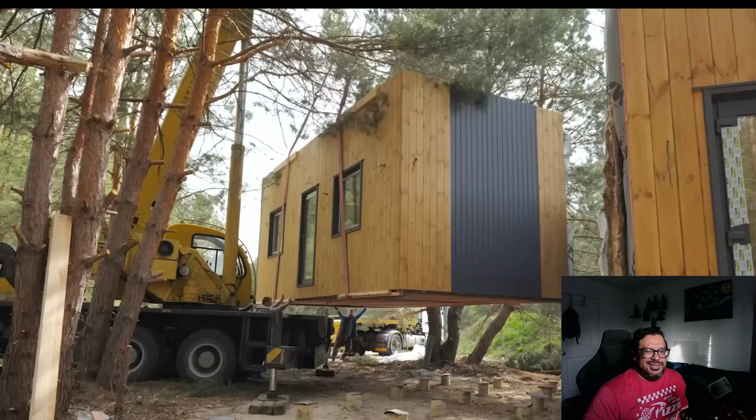Prefab homes are faster and cheaper to build than traditional homes. They promise less waste, more sustainability, and flexibility, to be shipped to almost any location in the world. Faster, cheaper, depends. It's economy of scale. If you order a bunch, then yes, it'd be cheaper. The ones we were working on were pushing 150 per square foot.

So why isn't that future now? Hi, I'm Michael Wyetzner, and I've been an architect for over 35 years. And today, we're going to look at the many lives of prefab architecture, from its ancient origins to its modern innovations, and see why it could be the future of home building, but it probably won't be.

Exactly. I know where he's heading.

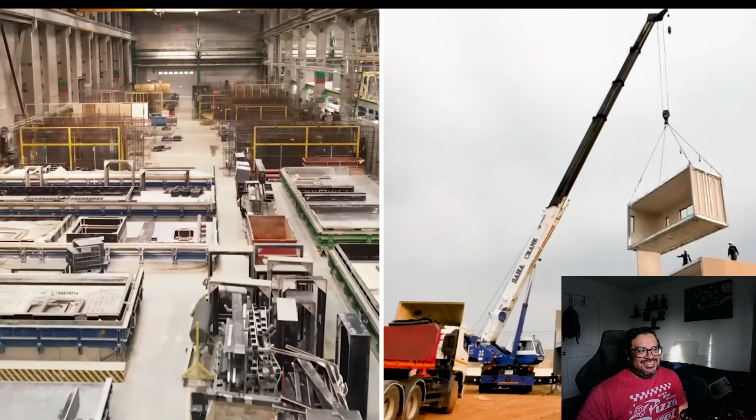First off, the word prefab is short for prefabricated, which just means that the components of a building are created in one place and assembled in another. The earliest forms of prefab housing were created.

So prefabrication is exactly how he said it. There's all kinds of types, right? You can have the full modules completed, or where we worked it was a full module completed, shipped, assembled on site. There wasn't really much assembling, right? All the plumbing was included, all the furniture was included, everything exterior. You would have to leave about a half-inch gap between the units so you could finish it off.

There's also back in the 1940s, when the GIs came back, there was the Sears catalog. They would sell you a kit of parts, right? So they send you all the parts ready to assemble. You put them together. That's a prefabricated home. The other type would be they ship to you all the walls completed already, or there's companies that do that. They'll assemble the walls, everything, and they just come and pop it up together. So that's all what prefabrication means.

Tens of thousands of years ago by nomadic peoples around the world, including the Native American teepee, the Mongolian yurt, the Sami lavvu. I call it a stretch if these are prefab. They weren't assembled somewhere else and brought to site, right? These were assembled on site with their environment, the buffaloes they killed, the hides. So it wasn't exactly prefab. You could also say lightweight prefab, right? But he's right.

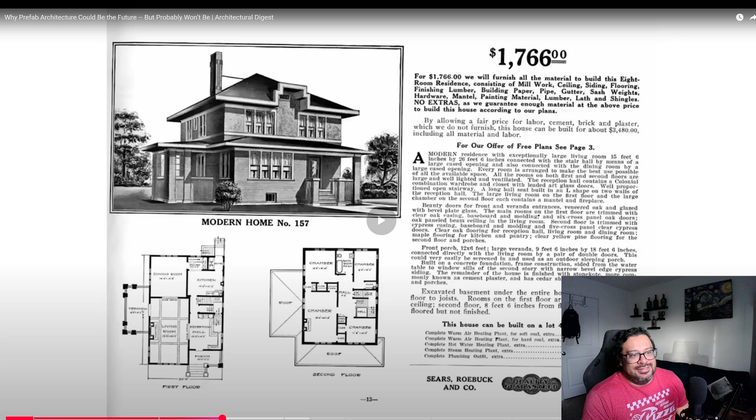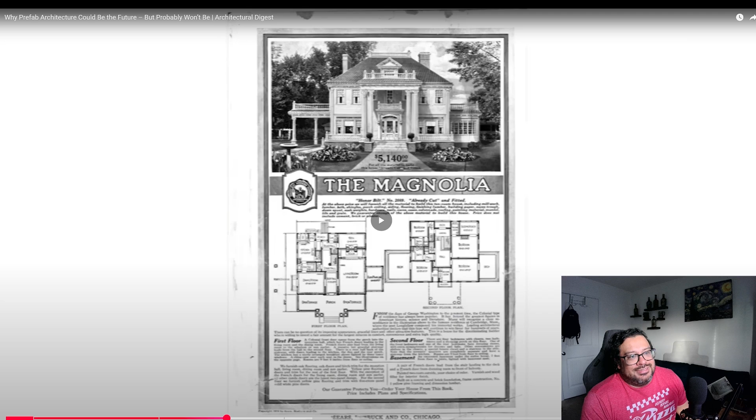Ordered a home from the Sears catalog. Now you have all the red tape of permits and all that stuff. They would provide you with wood pieces cut to size. And you guys will see right away, you guys might know these homes. You might walk by them, they still exist. Very well built. The nails and the screws and the directions.

And oftentimes we'll hear the criticism, right? Oh, they don't build the homes like they used to. No, those homes have problems. Try being in one of those homes in a hot summer, and if it wasn't designed to allow fresh air through, it's hot. I think homes today, the craftsmanship is not as good as it was back in the day, but the materiality and the energy efficiency are much better today than they were back in the day. Just like a flat-packed piece of furniture that you would buy today.

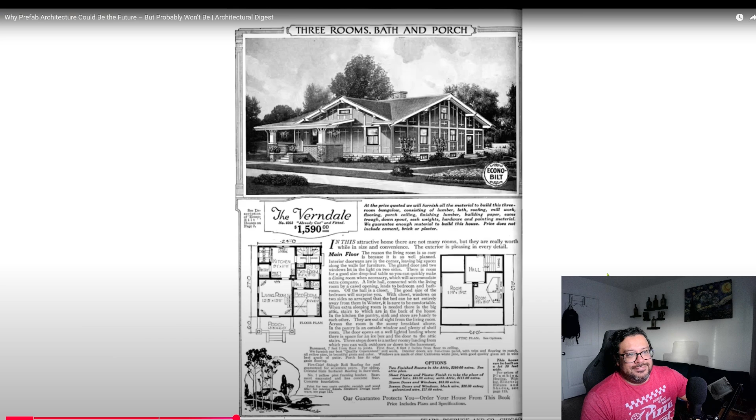Sears Modern Homes, as they were called, offered over 370 designs, and they sold more than 70,000 kit homes from 1908 to 19... There's actually an excellent book about all the kit homes and the history. I recommend everybody read that, even if you're just an aficionado. Your home might be a kit home if you live in something before the 1940s. They still had to lay the foundation, provide the plumbing, and provide the electricity, and they had to do that all themselves or pay somebody else to do it.

Which brings up a point of clarification about prefab homes. Some types of prefab houses are more prefabricated than others. At one end of the spectrum, you have these kit homes, which arrive in pieces. Oh, look at those diagrams. Nice. Our firm has actually designed a kit home of this type. My partner Frank Michielli devised an ingenious system for transporting a 2,000 square foot home in a single shipping container. Then there was a middle ground where some component parts.

I mean, that's actually pretty interesting. So I think what he's trying to say, a typical shipping container, right? You're going to fit everything in there. So it's going to be a small home. Where we used to work, our limits on shipping were basically the size of the truck bed, both length and width.

That was your module. You could get a longer bed and use it, like a cable... I forget what's like a cable truck bed.

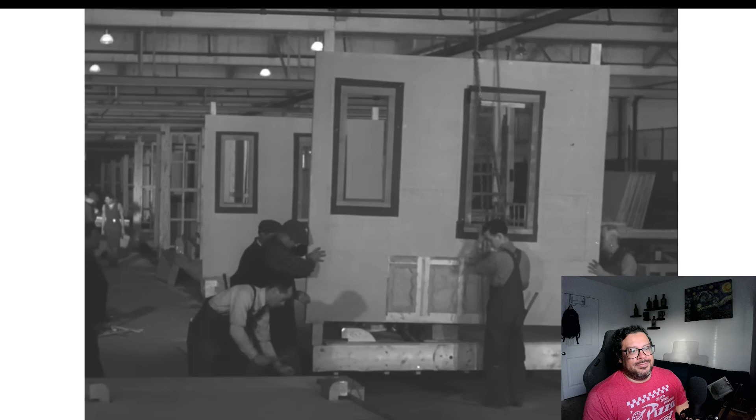Even entire rooms are pre-assembled in a factory and then attached on site. And it ranges all the way to homes that are completely built in a factory and shipped to the location fully assembled. But even this last type of home will need a foundation, a connection to the sewer system or a septic field, and electrical power from the local grid or a generator.

So let's take a look at some of these other types of prefab houses, starting with an entirely prefabricated version, the trailer. So this is probably the most famous of the trailers, and one of the first, the Airstream. It's got this sort of capsule shape. It's streamlined. And I also love that it's completely made out of metal. It's aluminum, lightweight. Imagine how hot it would get, though. It's a single axle, so it's only one set of wheels.

It's very reminiscent of trains and airplanes. And this goes to show architecture's influence. In fact, many of those trailers were designed to use surplus military designs and material. A lot of our ideas come from totally different fields. And what's different about it is you hitch it up to your station wagon and you take it anywhere. It could be the first wave of prefab housing that was driven by manufacturing.

There was a rapid rise in the number of people who owned cars in the United States in the early 1900s. This meant that people could travel more often and farther afield than ever before. But at the time, there were relatively few hotels and places to stay compared to today. And that led to a demand for what was called a motor home, or trailer home, which you could hitch to your car and take with you around the country.

Because so many people were traveling this way for recreation, it led to the creation of mobile home parks. Call back to gypsy caravans, right? These started in California, where they were originally just campgrounds where you could park your campers. But starting in the 1920s, these mobile home parks became places for permanent residents, which led to different designs for mobile homes.

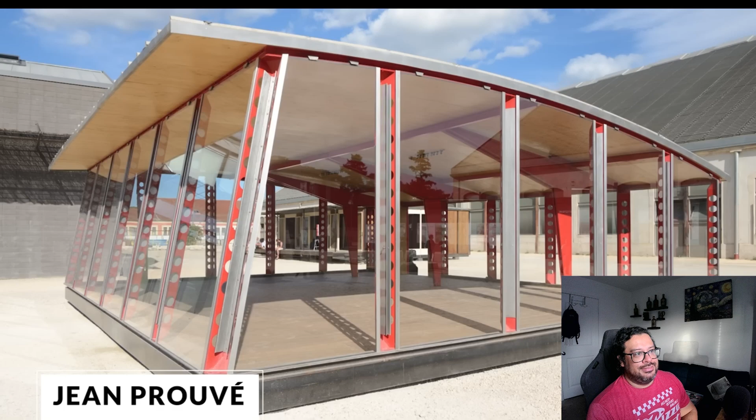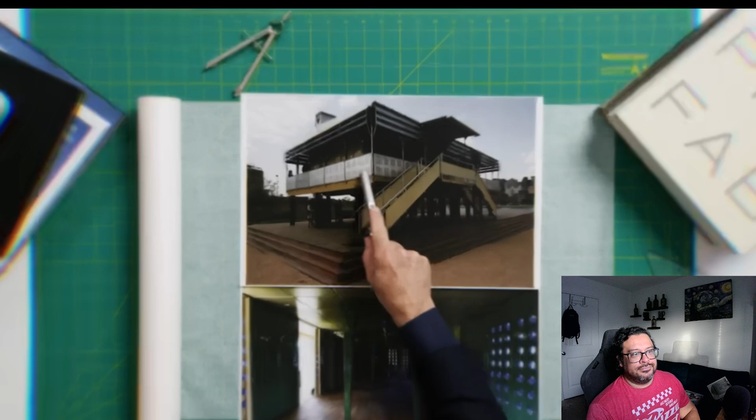This is the Maison Tropicale by Jean Prouvé, a great French modernist architect who experimented with prefab construction using military surplus materials after World War II. This house was actually intended for the French colonies, but it gives you a sense of the designs he was creating at the time. On the exterior, he creates a brise soleil, or sunshade, since it was intended for the tropics, to prevent direct sunlight from entering the house. He also uses prefabricated vented parapet panels to create a balcony, and simple rails made from stretched canvas strung to the metal structure.

It's almost like a structure you'd see with a sail on a boat, just because of the ingenuity.

What's really remarkable about this house, compared to something like a shipping container, is that he doesn't like shipping containers either. This house, while built from a kit of parts, is done in a much more sophisticated manner. I think that's the reason most architects are against shipping containers - it's not solving a problem. There's no problem; shipping containers are still being used constantly. There were just people, mostly GCs, buying them to cut costs and build this way. As I was saying before we got cut out, as soon as you start cutting into the container, you already sacrifice the structural integrity.

So you have to reinforce it with studs, and you're already going to lose about 5 inches of interior space, unless you do an exterior structure. Whatever you cut out, you have to reinforce, add insulation, and bring it up to code. So basically you lose a lot of space by using a shipping container. We actually did one project using shipping containers, and it was horrible.

It truly speaks to Prouvé's ingenuity and resourcefulness. It's a beautiful project, I totally agree.

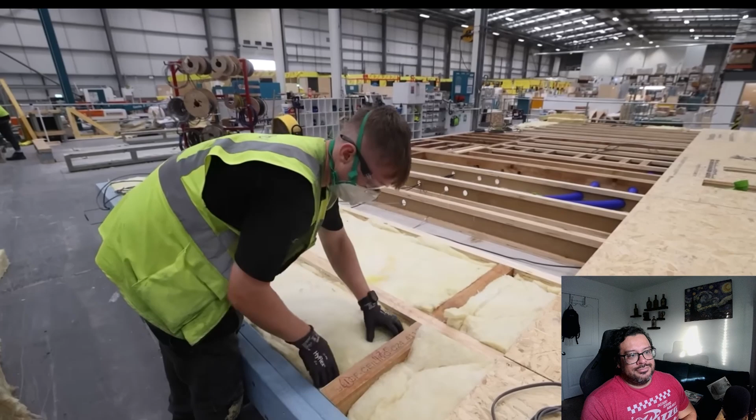So why isn't prefab the future of housing? Well, one reason is the extreme startup costs. To get one built, you've got to create a factory, train a workforce, get all these materials together, and that's the only way to make your money. There's not that many companies in the United States that actually do prefabrication.

If you look at it, there's only a couple. The one I worked for was one of the bigger ones in Southern California, and they shipped to places like Utah, Colorado, and others. So there's not that many. There's one around the corner from this house, and they're more local, but it is a huge cost.

You have to buy all your materials up front, so you've got to look at the market. One thing our PM did was look at the price of wood ahead of time, and when it dropped to a lower price, he'd buy a bunch, because you had to predict, right? A lot of the newer companies try to partner with GCs to offset the cost of manufacturing, getting into contracts with them.

I think where it shines, and where it wasn't spoken about much, is that prefabrication has helped a lot in schools. If you look at any school now, chances are 90% are prefabricated. We've done schools up to five stories high, prefabricated structures with giant steel columns and steel structures. This methodology did good in the end because it allows schools to be constructed, and oftentimes these prefabricated modules go through very rigorous testing. Inspectors come from the city and county to check everything, the welds, everything. Oftentimes, to me, these schools are safer than houses.

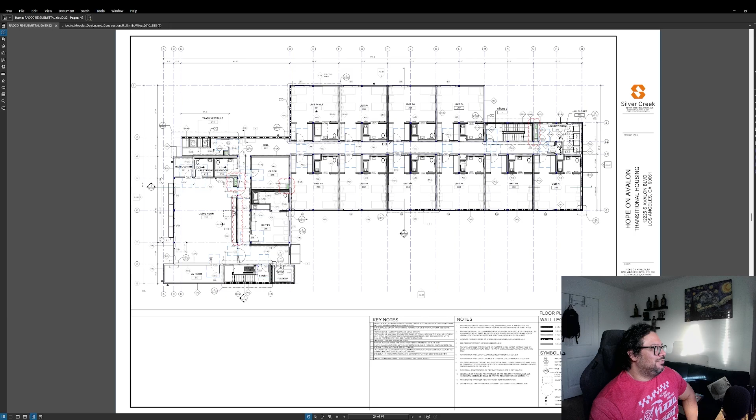And then just quickly, I wanted to show you some of the projects that we did. So this is a project we did for prefabricated transitional housing. You can kind of see here there's this half-inch divide between these units. So the whole module, for example, would be—this is a module.

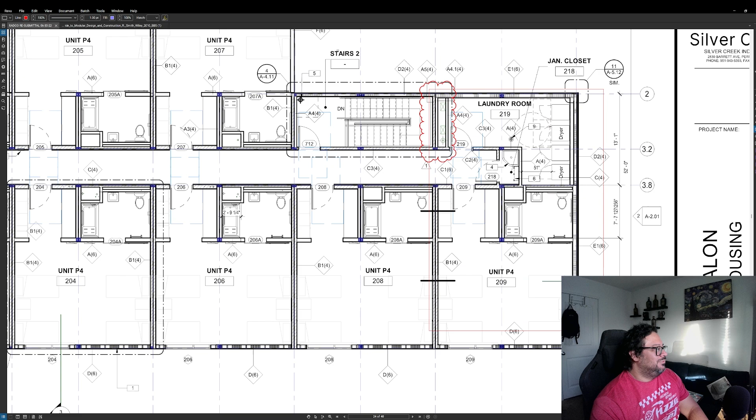Let me put some color in there. So we'll call this module A. Give me a second, there you go. And then we'll call this module B. And we have one more module. This whole thing, I believe, was a module.

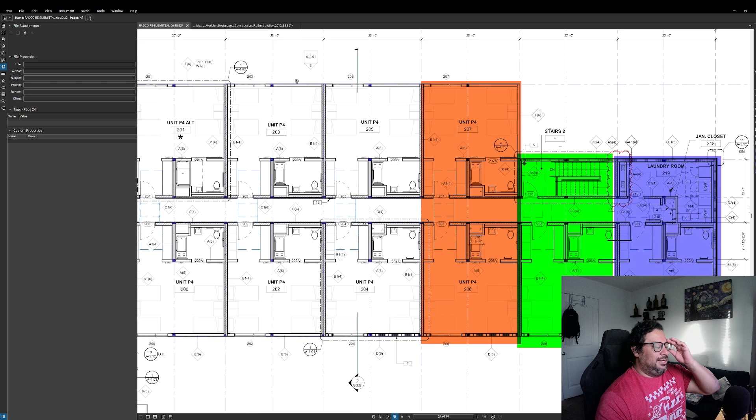Okay, there you go, so this is the premise, right? The premise is you prefabricate these in a factory. So this module, everything's prefabricated. There's a half-inch gap, so it's a one-inch gap total, half an inch this way, half an inch this way between each of the units.

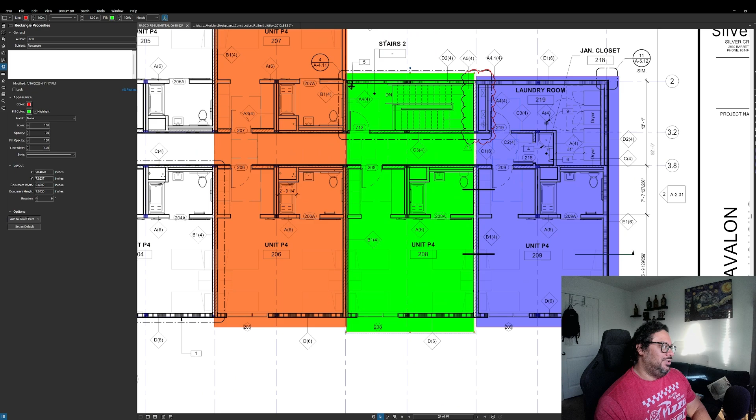So that's one module. Your second module usually would be the stair module, where we try to keep the stairs in one area. You can see the full length of this whole unit is 52 feet, and I believe that's the maximum you could get for a truck bed. Let me check—these full units are 52. This one, let me get a measuring tool. So that one looks like it's going to be about 15, 24, a little bit less than that.

Where's my settings? It's because they update and take off all your settings. Okay, so what is that? I don't like that, I don't want it to move.

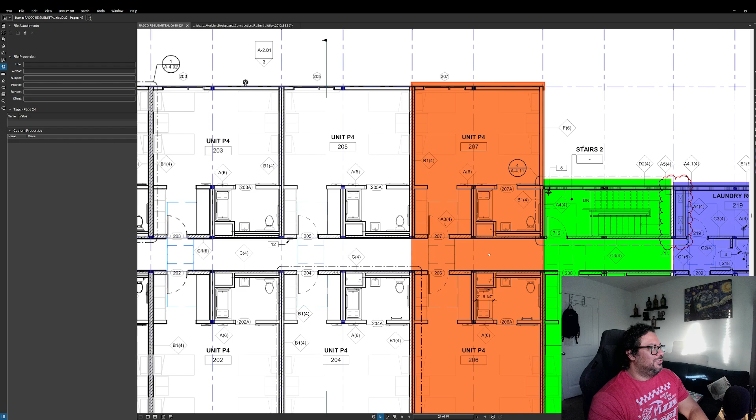So that's one module, and this is the second module. And this is the main module, so this is what's going to get shipped out in that truck bed. I think width-wise they're only 20 feet maximum, so these kind of overhang a little bit from the truck bed, if I recall. They needed a super special long truck bed to ship these out together. So these are all one module.

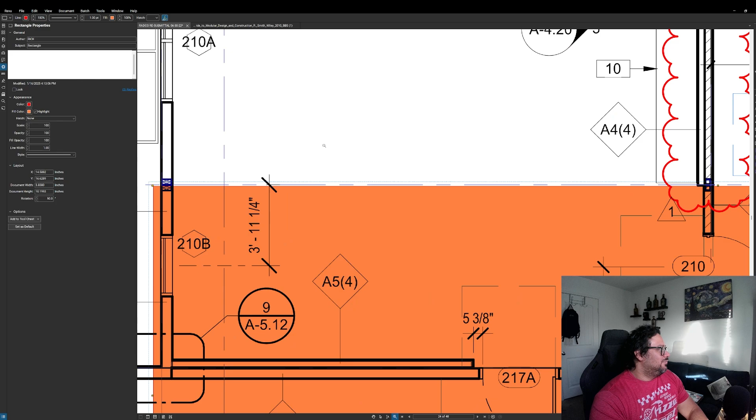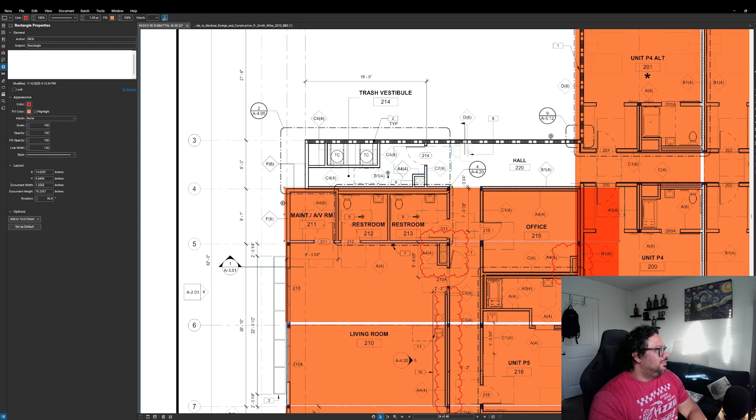So that's 1, 2, there you go. So that's those, right? And then here it gets a little more tricky. So here we shift it, so the modules... here the modules flip like this. And you'll see there where they have that double stud, that's where it ends. And then we'll have another one here, and another one here, right there, and another one here, and I believe this one right here is another one. It's been a while. And then the last one would be this portion here.

So that's kind of how the system works when you're going to design these. I believe there's a roof, same with the roof - you would have first floor modules, second floor modules. So the roof system as well was going to be attached already. This is already going to be built when you ship them out.

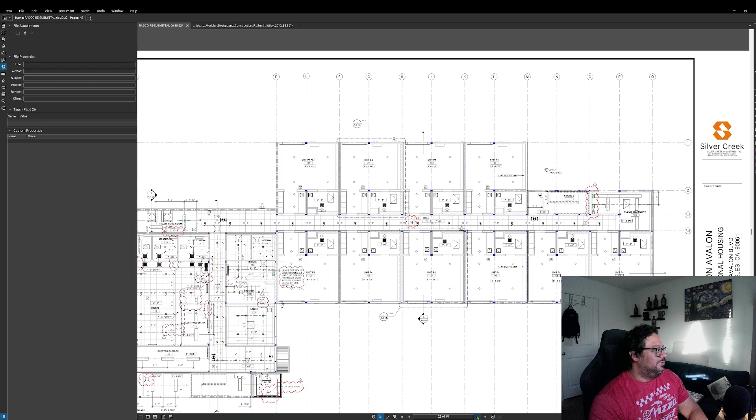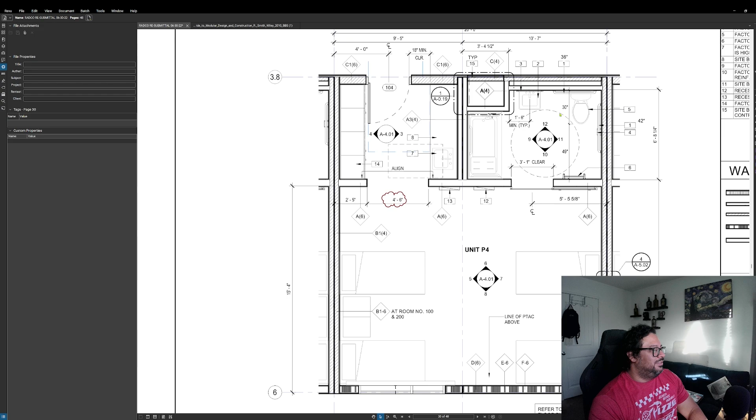And the next part is just more details, lighting details. I'm trying to see if we can see. I know we did sections, I know we did shop drawings, so we want to see those. So this is a typical unit here - you kind of see this is a half of a unit, so you're going to see this system, one of the double loaded corridor.

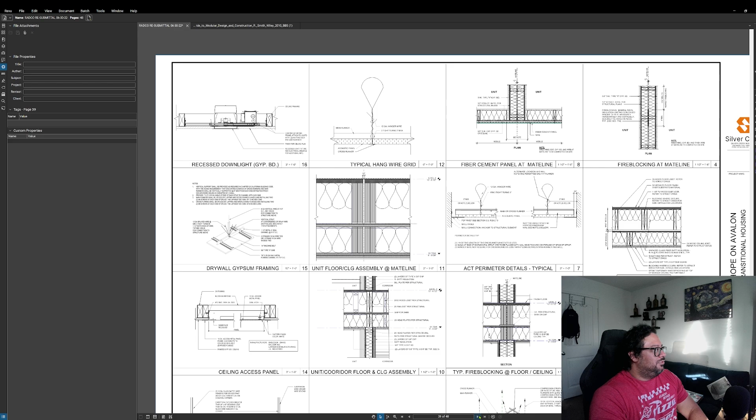Let's see, I'm trying to see if we can see the section details. It's been a while. Interiors. Oh, there you go, so there you go. So we call it a mateline, basically - this is where two units meet. So you have unit one on this side, and this is where it ends, and then you have a half inch gap between them. And this is your typical construction for these type of units.

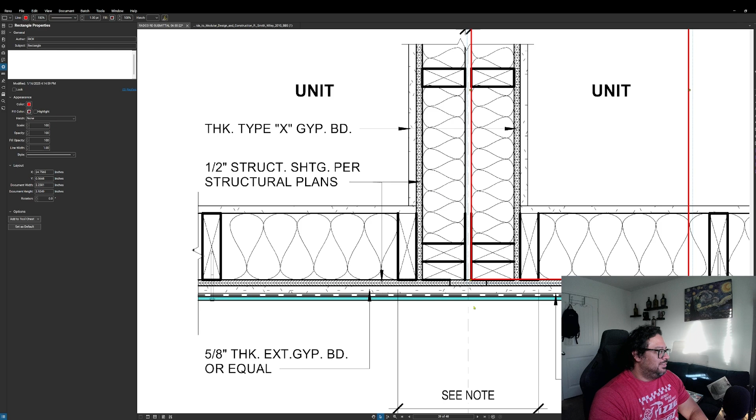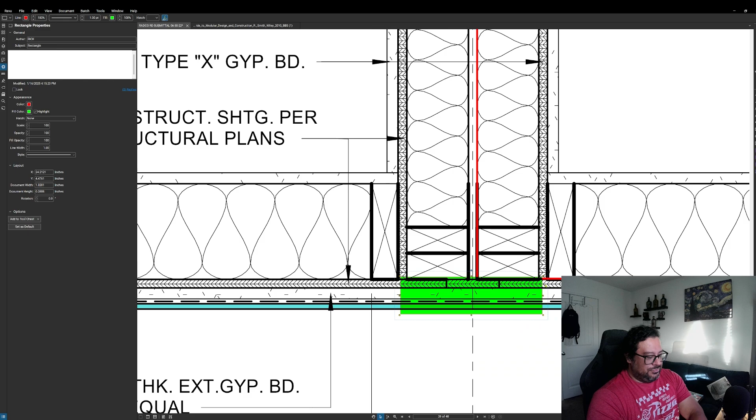Usually we'll leave - I believe this portion doesn't get built, this gets built on site. So when you get on site, you line them up and then you fill it in with this material, which is what you'll see in the exterior elevations. You see a band that comes down, right? So yeah, that was your typical prefabrication that I worked on.

Here you can kind of see this is a book. So if you guys want more information on prefab architecture, by Ryan Smith. And this goes over all the history of... let's see if I can... it's a big book, so we'll see. Oh my god, I am like out of it with my programs today.

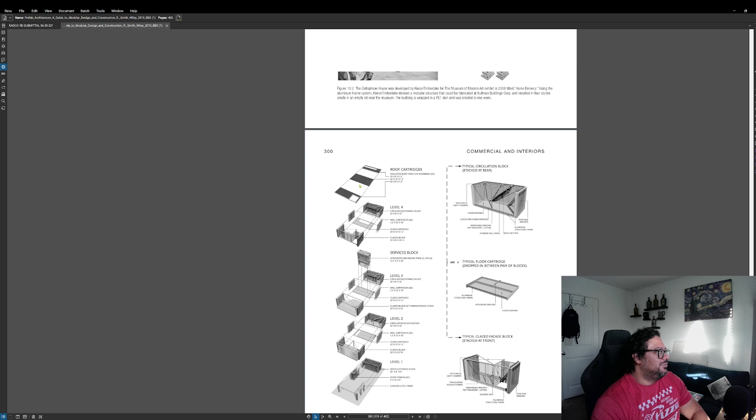Alright, so this is a great book that you guys can buy off Amazon, Kindle. It goes through all the prefabrications, the history, and then it goes into the different eras up to modern, I believe. It goes into the actual constructability and what's being used, and it just keeps going and going. It's a great book, and here you have some crazy ones that are being built. It goes into more details of items and things of that nature, prefabrication homes. So this was called Prefab Architecture by Ryan Smith - check that book out.

Anyways, hope you guys liked the video, the response to that video. I think that was a great explanation of prefabrication and why we don't see it as often now, or why it's kind of dying down. It has become a key point that I want to make - it has become a rich thing. All these prefab homes you see are for the rich. The cost has gone up to just build one because you're taking space in the line to build one home instead of thousands, right? Design wise, it hasn't really improved, not a lot of firms are doing them anymore. Container homes suck - won't change my mind on that.